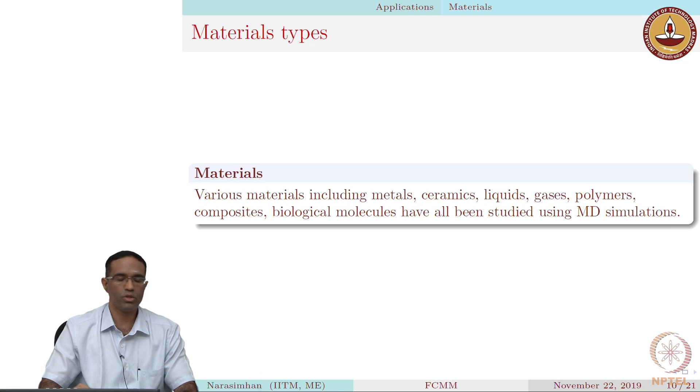The first example concerns the mechanical behavior of a CNT aluminum composite. Carbon nanotubes have played a very important role in improving several properties of materials, and mechanical properties is one amongst them. In this article, published in Composites B, the authors used molecular simulations to see what happens when you put carbon nanotubes inside an aluminum matrix, and examine the toughness and elastic properties of this composite material.

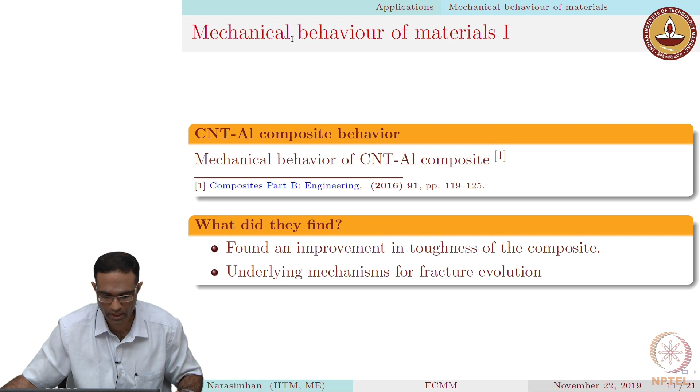So it's a good idea to take a look at what they have done. I'm going to open up the article. This is the article here. If your university has a subscription to this journal, please take a look at it, it's extremely interesting. The paper basically investigates the mechanical behavior of the composite material where they put carbon nanotubes.

They put carbon nanotubes in an aluminum matrix, changed the type or size of the carbon nanotube, and performed an axial test to examine the mechanical properties, in particular the Young's modulus and toughness of the composite material. Looking at the abstract, they found that the Young's modulus of the composite improved by nearly 31% for one type of carbon nanotube, 33% for another, and nearly 39% for a third different type.

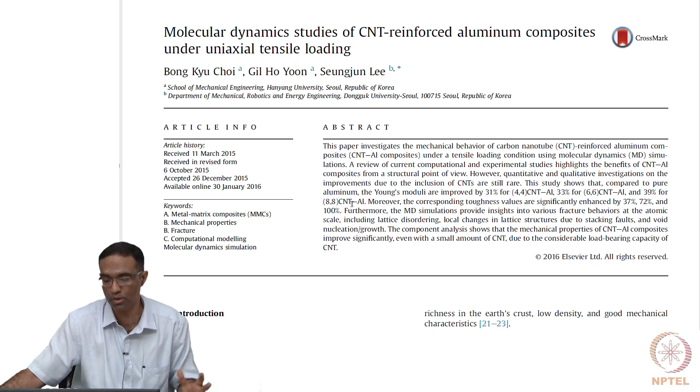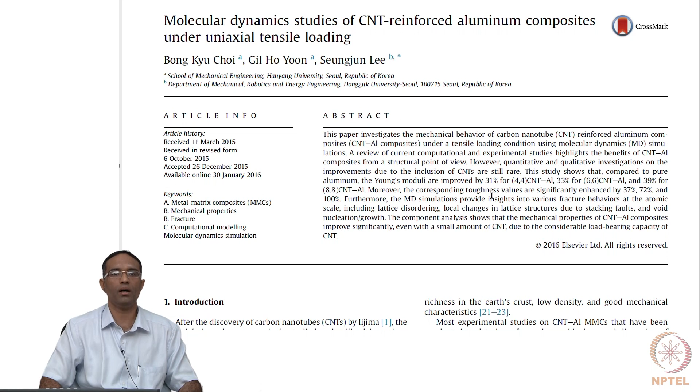They also found that the corresponding toughness values of this composite material were significantly different compared to aluminum itself. So molecular dynamic simulations can be used to examine the mechanical properties or qualitative features exhibited by materials when different modifications are done to them.

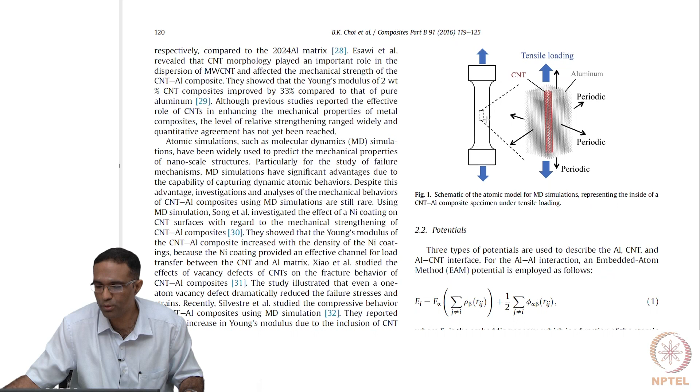So in brief, what did they do? They basically simulated a small portion of a dog bone specimen. A dog bone specimen is just an example - you don't simulate the entire dog bone specimen in MD, you do a small portion of it. Assuming this is the small portion taken, you see the behavior in figure 1, where the carbon nanotube sits right in the center and is surrounded by the aluminum matrix. They have to give proper interactions existing between the carbon nanotube material, which is basically carbon, and the aluminum atoms, and of course between aluminum and also between the carbon atoms.

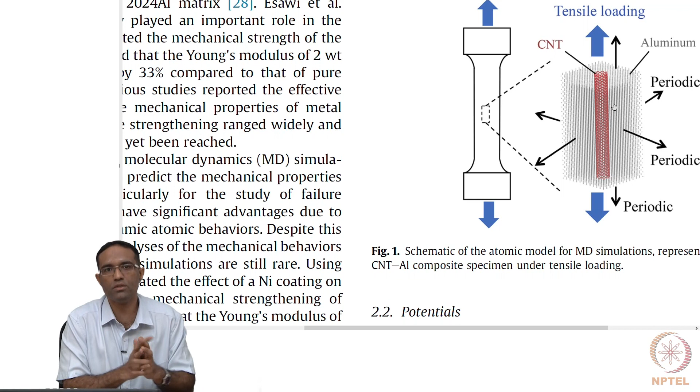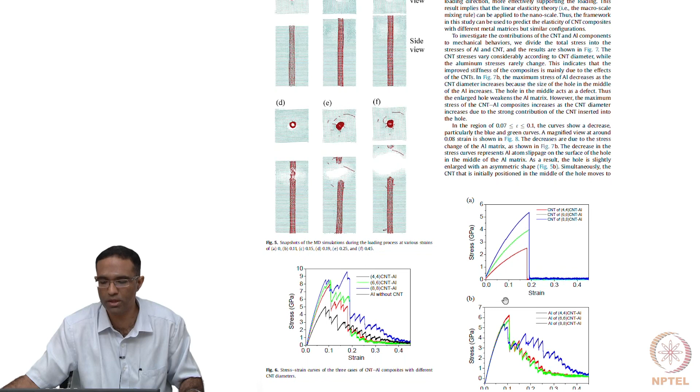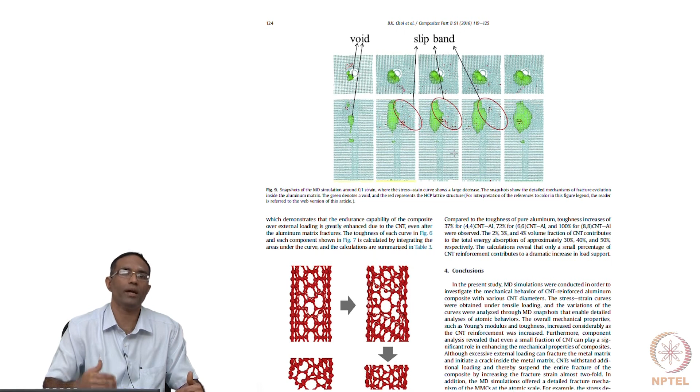When they look at the atomistic behavior of the material, they show that there are voids that are formed and slip bands that are generated, and how these vary in the presence of the carbon nanotube is also discussed. So it is possible to look at atomistic level features to explain some of the observed macroscopic properties, such as changes in the Young's modulus or changes in the toughness of the material.

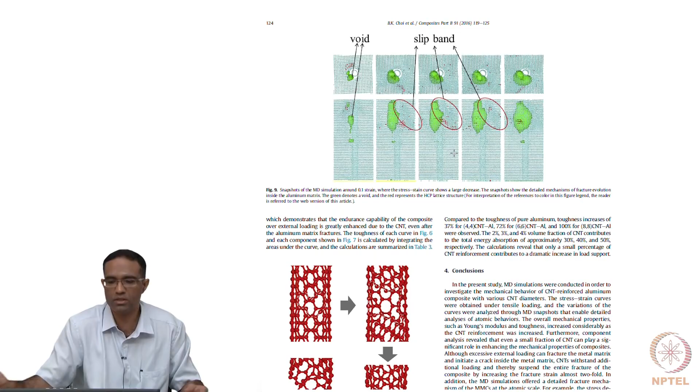So this is one application where we talk about mechanical property variation, with respect to metals. Now let's look at something else - I will show you an example with silicon carbide, which is essentially a ceramic.

As you may know, nanocrystalline materials have several interesting properties, and nanocrystalline silicon carbide is particularly interesting because it is expected to have high resistance to something called radiation damage. Furthermore, it is useful for electronic applications, and is also used as a tool for machining purposes. Now, when you have nanocrystalline silicon carbide, some of these properties are expected to be enhanced.

In related works, which are in these two articles, Applied Physics Letters and Science, MD simulations of nanocrystalline silicon carbide have shown very interesting results. Unlike the previous example of a single crystal aluminum with a carbon nanotube in between, this particular Science paper deals with constructing nanocrystalline silicon carbide.

I will show you a few pictures from the paper. They have several different grains in their sample, each grain consisting of an array of atoms oriented in different directions. They perform an indentation test on this sample and try to understand the load displacement response, and conclude various fundamental physics about this particular material.

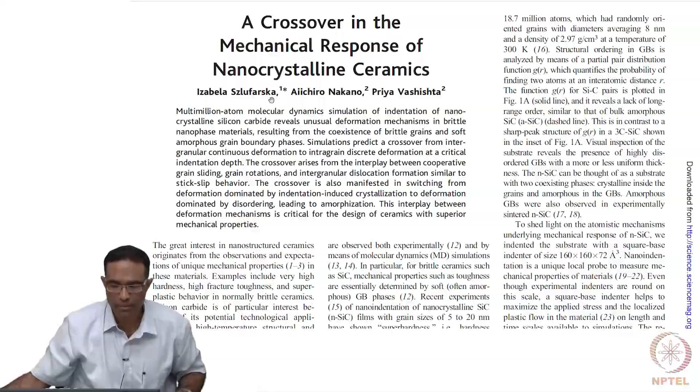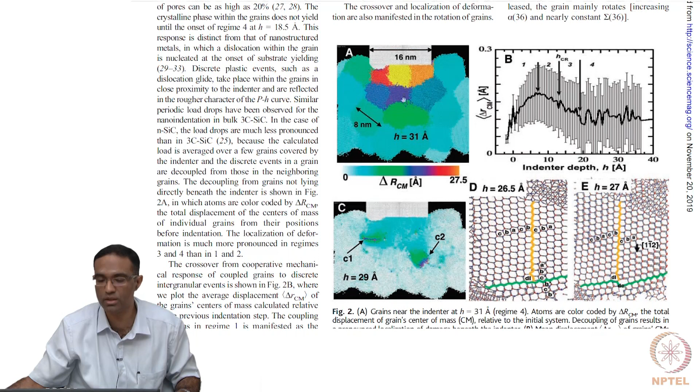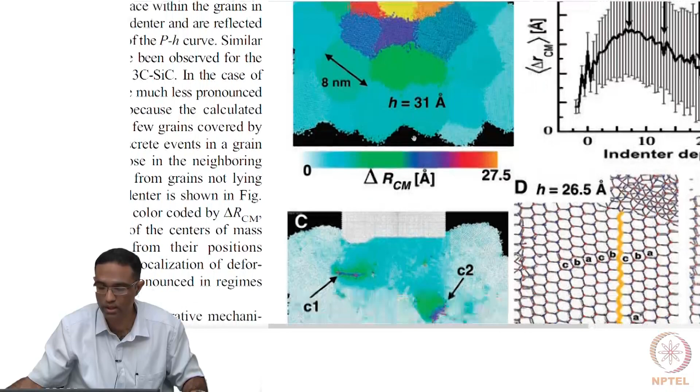Let's take a look at this. This is a Science paper. I'll show you some pictures representing the kind of simulation system they are using. This is your nanocrystalline silicon carbide, and they have used several different grains, each colored differently, and you can see the indenter right here. When they perform this indentation, you get a load displacement graph, and from this graph it's possible to look at several features of the material.

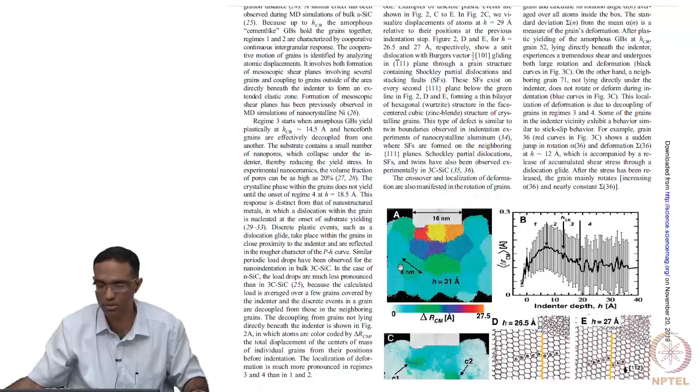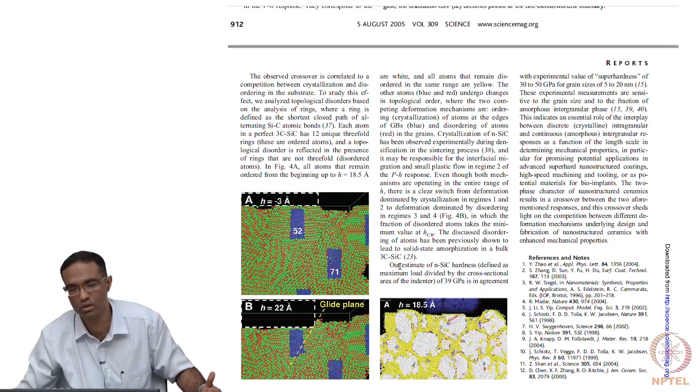It's a good idea to take a look at this if you have a subscription, or if you're able to get hold of this particular paper. So in this manner, it's not just a single crystalline material that one can deal with in molecular simulations, but it's also possible to construct nanocrystalline materials and look at their behavior.

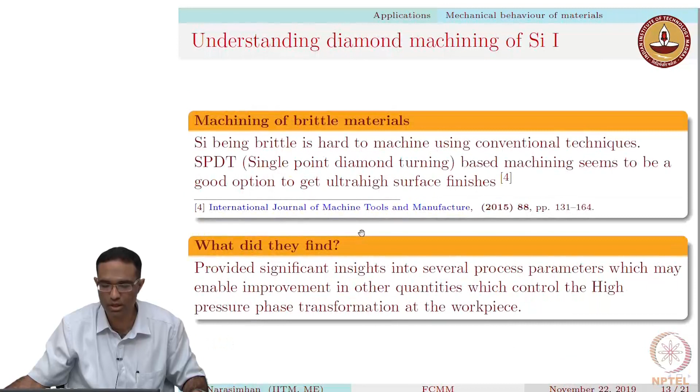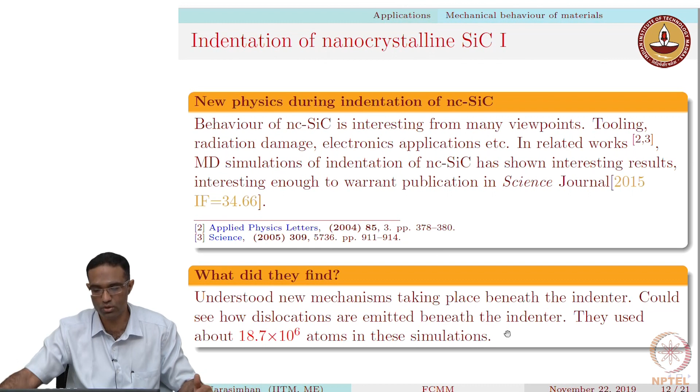In this article, primarily they found that there are new mechanisms taking place beneath the indenter, and they could see how dislocations are actually emitted beneath the indenter. Of course, this dislocation emission is more clear in the Applied Physics Letters paper.

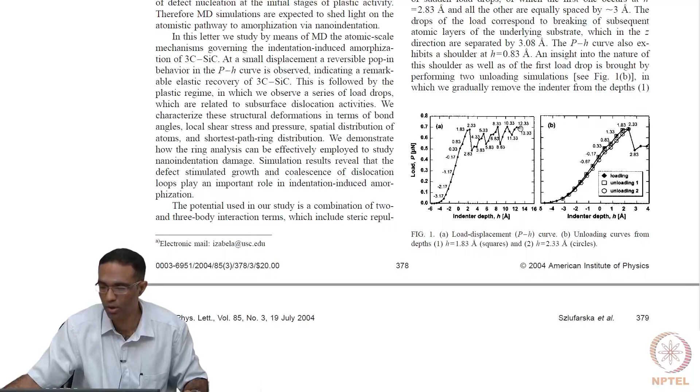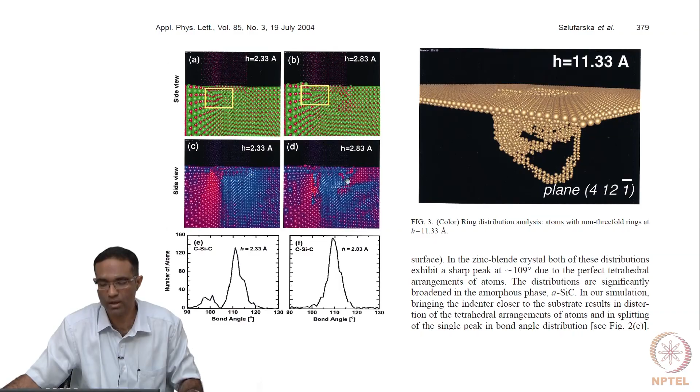This is the nano-indentation-induced amorphization in silicon carbide. This is the load displacement plot they have, and this is not really a nanocrystalline material—they used a single crystalline material. On performing the indentation, they marked the atoms deviating from their normal behavior, and they're able to look at the manner in which dislocations are emitted beneath the indenter when they indent ceramic materials such as silicon carbide.

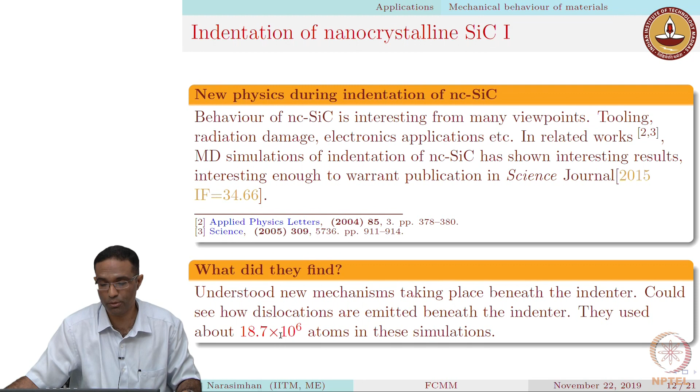So this is an example showing the mechanical behavior of a ceramic material. Another thing I'd like to point out is that the Science paper uses atoms in the order of about 20 million for performing these simulations. Some of their grains are quite large, in the order of about 8 nanometers.

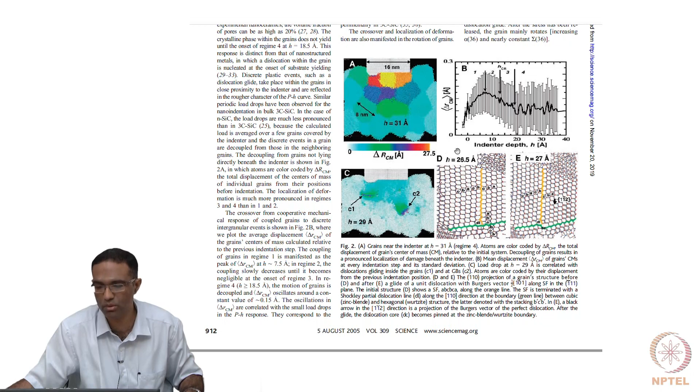It's actually quite large when you consider this to be an atomistic simulation. The total number of atoms was about 20 million, which is huge. Some of these simulations can be expected to take a very long time to complete, so you must be careful to set up your input files so that if the job dies in between, you should be able to restart it from the point where it stopped. Some of these things are extremely important.

Another example I'd like to point out is in manufacturing. Like I mentioned in the previous class, what's important about MD simulation is to get some qualitative insights into material behavior, not always worry about matching numbers between experiments and simulations. One such example is machining of brittle materials. Silicon, being a brittle material, is hard to machine using conventional techniques—it's just too brittle. Single point diamond turning based machining seems to be a good option to machine and get ultra-high surface finishes in these materials.

There's a paper here in the International Journal of Machine Tools and Manufacture. This is just to point out that molecular dynamics simulation is also being used in the manufacturing area—it's not restricted to material science or mechanical engineering or determining just thermodynamic properties, but it has been extended to several other areas as well.

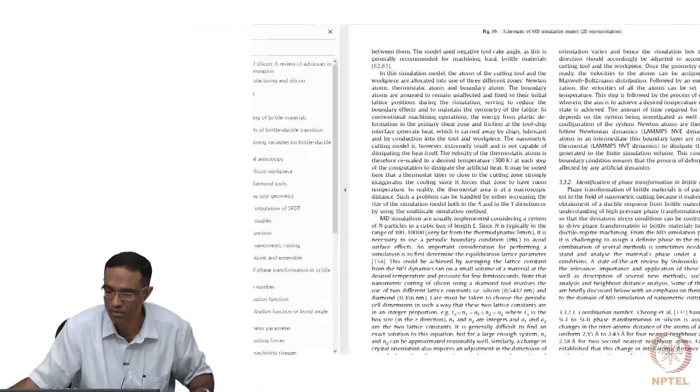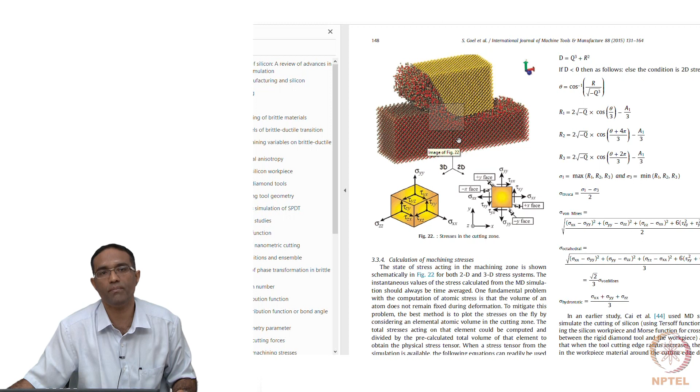It's important to know what they find out. They found that various process parameters can be changed to improve the manner in which high pressure transformation takes place beneath the indenter, which can enable improvement in other quantities related to manufacturing. Of course, these examples are very qualitative—I don't intend to go through the entire article and tell you exactly what they did.

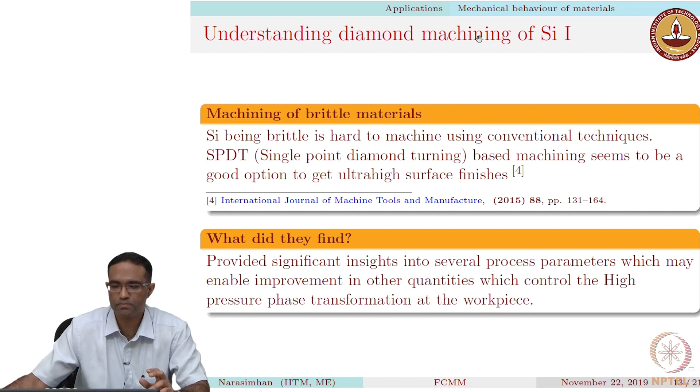This is just to provide a brief overview of the applications in which molecular dynamic simulations have actually been used by various researchers. Another example, so we saw some examples on mechanical behavior, where MD simulations have come of use in manufacturing or in machining operations.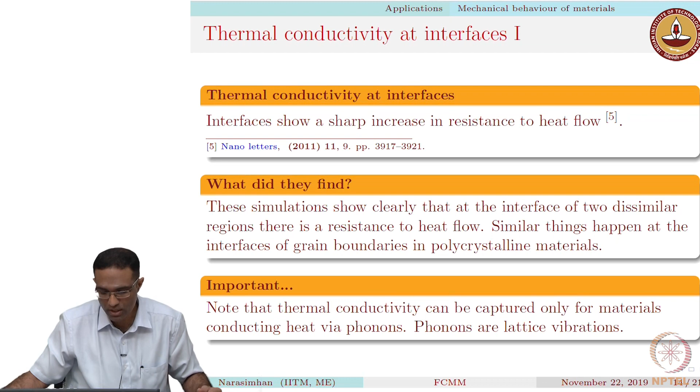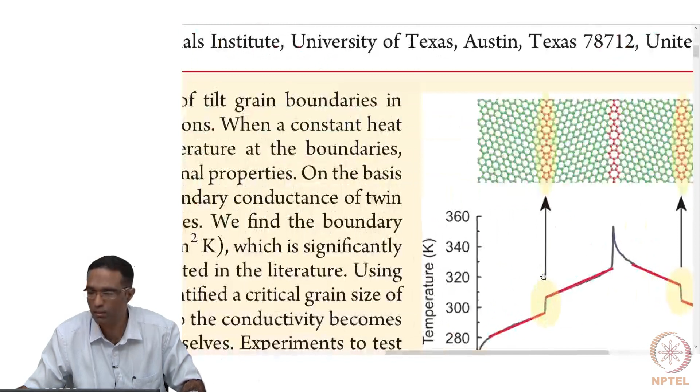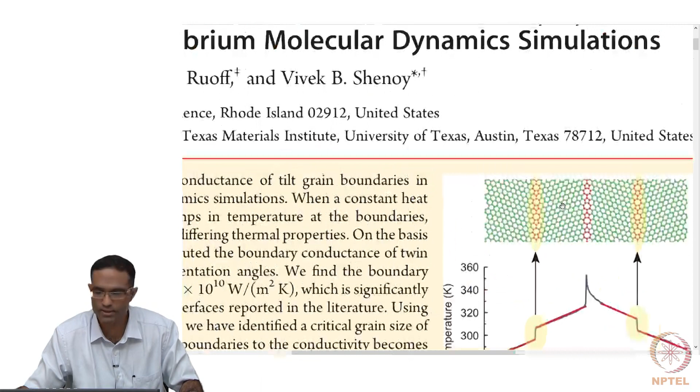Thermal transport across twin grain boundaries in polycrystalline graphene from non-equilibrium molecular dynamic simulations. If you take a look at this paper, this figure in the abstract, they built atomistic models of graphene. This is all graphene right here, and the orientations of this side and that side are all different. Consequently you have some sort of mismatch between these differently oriented graphene sheets, and it is interesting to know what happens when heat flows in such a material.

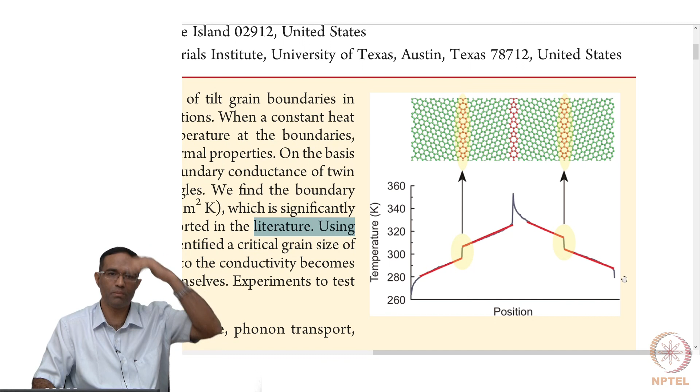This is a plot of temperature versus position across this distance, and they see a linear variation in temperature with position. You can take the slope of this to relate it to thermal conductivity. But at this particular point where the grain boundary exists, there is a sharp jump, basically indicating there is a higher resistance to heat flow at these grain boundaries. It's possible this has also been done not only on graphene sheets but also on other bulk materials with grain boundaries.

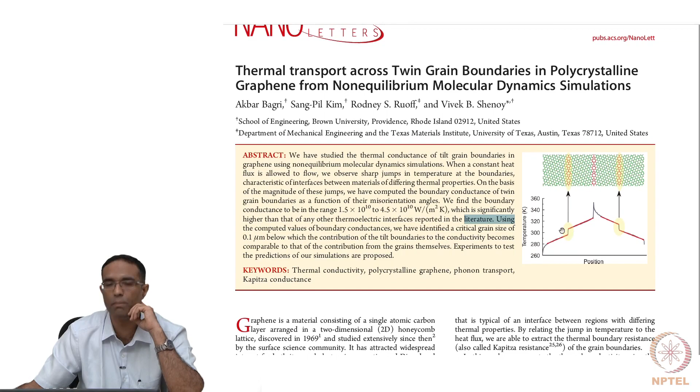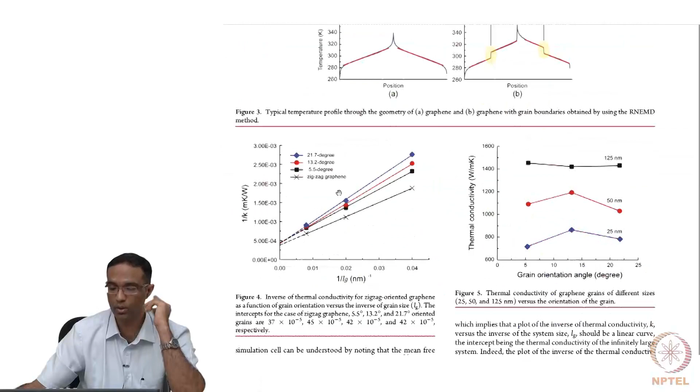So it's possible for us to find out thermal conductivity as well, using molecular dynamic simulations, and there are several different approaches to do that. In this paper, they have taken a direct approach where they maintain different temperatures in different regions in order to obtain that jump in the temperature profile, and hence evaluate the thermal conductivity. You can take a more detailed look at this paper if you are interested in calculating these aspects for your research work.

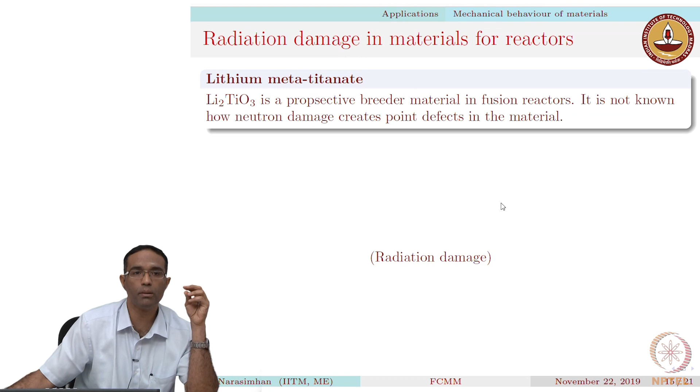So that's an example where you calculate thermal conductivity with MD simulations. Another example is molecular dynamic simulations in radiation damage of materials. In radiation damage, we are talking about materials used in nuclear fusion or fission reactors, and simply because there is a lot of activity in these reactors, ions, electrons or neutrons may bombard the structural materials in these reactors.

When a material is bombarded with high energy atoms, you create what are referred to as point defects. You may create vacancies, interstitials or antisites, and as these defects increase in number, the thermomechanical properties of these materials are expected to degrade over time. So it is interesting to know how many such defects are going to be produced in the material. This is clearly an atomistic level phenomenon, and the time scales over which the cascade process happens, where the atom comes and hits and creates a few defects in the material, is in the same order of magnitude as you can capture using MD simulations.

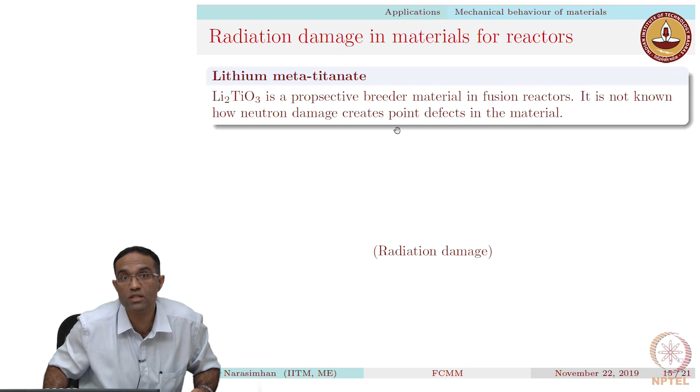This entire process generally happens in the order of a few tens of picoseconds in the real system, and MD simulations are excellent at capturing phenomena that happen in few tens of picoseconds, as I mentioned in the previous class. So MD simulation is perfect for actually capturing these events, which are referred to as primary damage events.

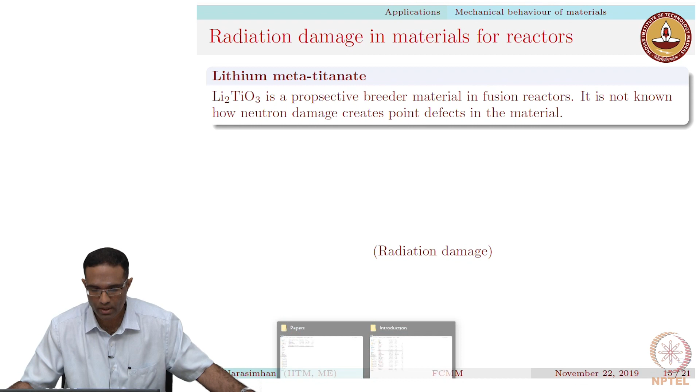I will show you some videos; this is an example of lithium metatitanate, and you can see one particular atom moving all of a sudden and creating a small cascade region here. This is a molecular dynamic simulation of this particular cascade event in lithium metatitanate, and if you wait long enough, after some time it creates a small region consisting of point defects, whereas the remaining surrounding region is still crystalline or perfect crystal.

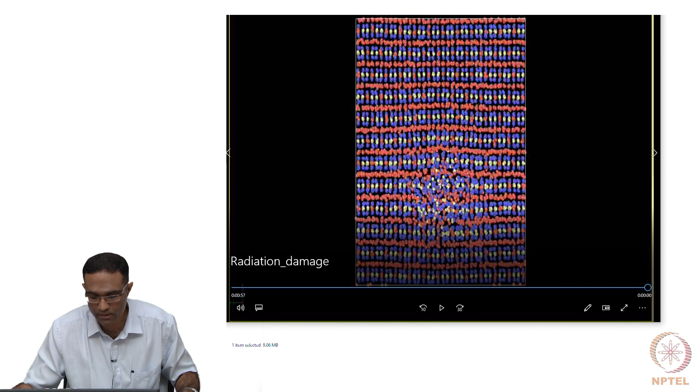What we are interested in is looking at how these point defects are evolving with time, and what is present at the end of the cascade. Cascade means the process by which the atom bombards this particular material to create point defects, and we can perform some analysis on this to see how these point defects are basically evolving with time.

These are typical kinds of plots you may get when looking at how these defects are generated over time. We see that the total time scale over which this entire simulation has taken place is about 10 picoseconds, and you can see some defects which are still increasing even after the cascade is completed, whereas some defects, such as lithium antisites, have kind of settled down to more or less a constant value.

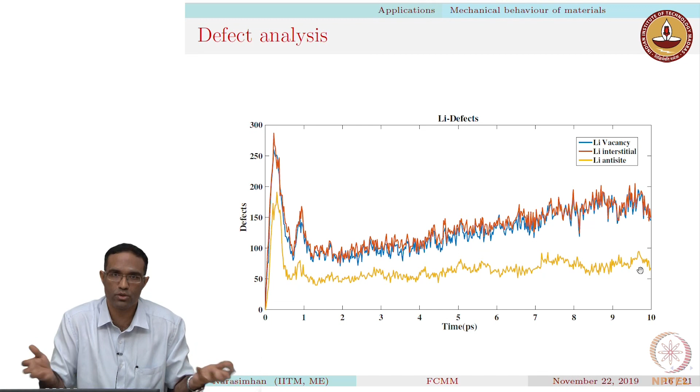Some of the results of this simulation could also be taken to higher level calculations for further analysis. For example, the number of defects generated during primary damage may serve as an input to a rate theory model, where you can analyze what happens at even longer time scales when the defects begin to diffuse. This is another example where MD simulations have been used of late.

So far we have seen some metals, some ceramics, and an example in manufacturing, but molecular dynamics simulations are also used in polymer simulations and protein simulations to understand various mechanisms related to protein folding and so on.

One application we were interested in our group is looking at how natural rubber is generally fortified using carbon-based materials such as carbon black, and its strength is generally affected by the strength that the carbon black has with the polymer surface.

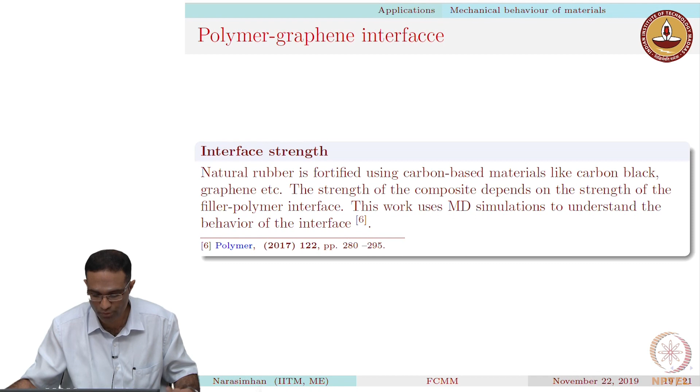In this work, the carbon black was modeled as a graphene sheet, and a polymer was placed on top of it. We performed extension experiments to understand how the system behaved at various rates of pulling, what the interface strength was at various rates, and where the failure actually took place. I will show you some examples of that.

This is an example showing the opening mode of separation of graphene: the initial assembly of the unwrapped polymer network. You see the polymer network right on top, and the graphene sheet in red. That's how we started off the simulation.

Then we perform a small equilibration where the polymer and the graphene sheet come together, and you can see all these polymer atoms vibrating.

In the next step, we separated the polymer from the graphene sheet at various rates. This is at an extremely slow rate. The rate at which you see this being pulled and the rate at which the simulations are performed need not look the same - things have been rescaled so the video appears within a reasonable time.

This is at some specific rate, and you see that the failure is happening somewhere in the middle of the polymer. This is at somewhat intermediate rates - that is the behavior you see, with chains being pulled to a longer extent, slightly faster separation.

Right now at intermediate rates, you see more polymer chains being stretched, and some of them still connected to the graphene surface over here. So depending upon the rate at which you pull the polymer, you see different behavior, and that's what is being captured by these simulations.

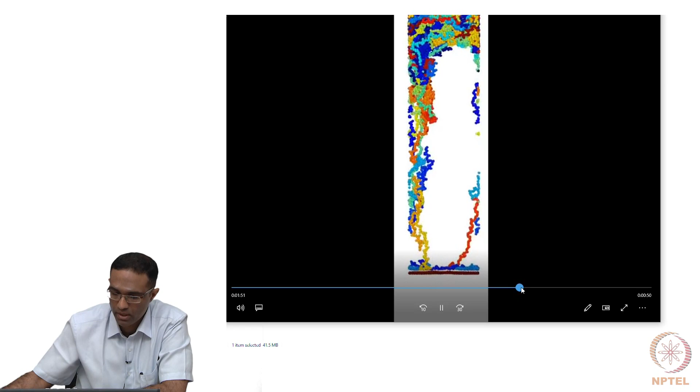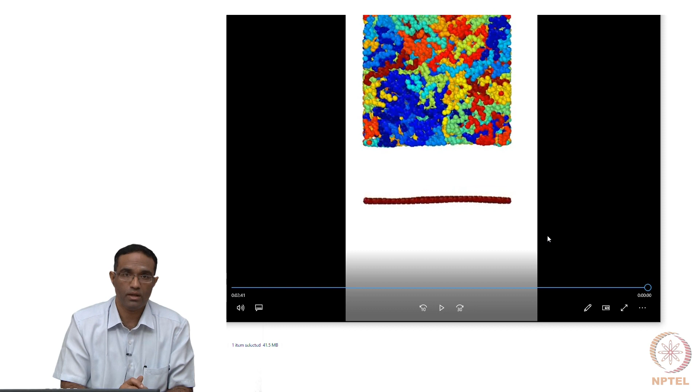At extremely high rate, the polymer does not have enough time to actually respond to the speed with which the graphene is being pulled, and it behaves like a rigid block. Some of these concepts are appropriate when you look at the viscoelastic behavior of these polymers, and qualitatively they match.

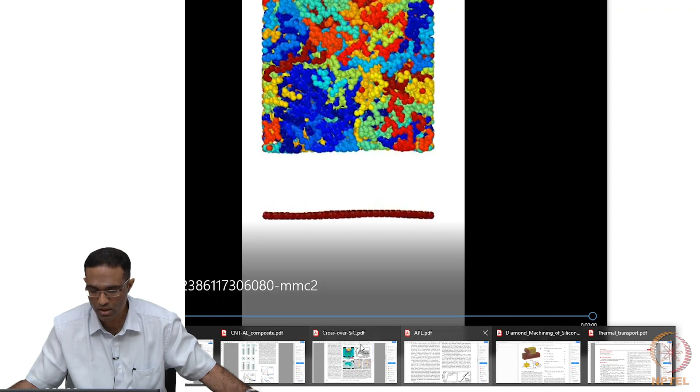So this is the behavior I wanted to talk about when I wanted to show you the behavior for the polymer material.

Another aspect that might be interesting is to look at molecular machines. The Nobel Prize in Chemistry for molecular machines was given in 2016, awarded to Jean-Pierre Sauvage, Sir J. Fraser Stoddart, and Bernard L. Feringa for the design and production of molecular machines.

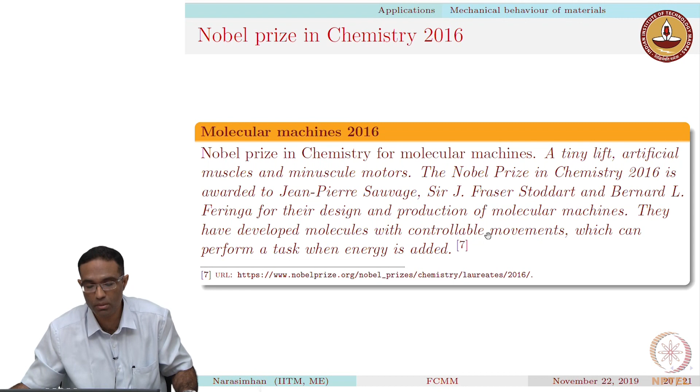Some of these machines have also been simulated and are available on the internet. You can find cool examples where molecular dynamics simulations show this behavior. I just wanted to show you some examples from the internet where people have made molecular simulations of these molecular machines. These examples can be found on this website right here.

Please take a look at this website. You will be able to see some very nice examples of molecular machines built using molecular dynamic simulations, such as a planetary gear, and there's also a fluid pump, if I'm not mistaken. These are some of the examples I wanted to give to motivate this course.

Of course, the range of applications extends far beyond the simple examples I have pointed out so far. In this course, being an introductory course, we may not be doing all these advanced applications. We will just learn how to perform some simple molecular dynamic simulations and connect it to some physics we are all familiar with. Once you know that, performing some of these calculations must not be very hard, and you should be able to pick it up quickly.